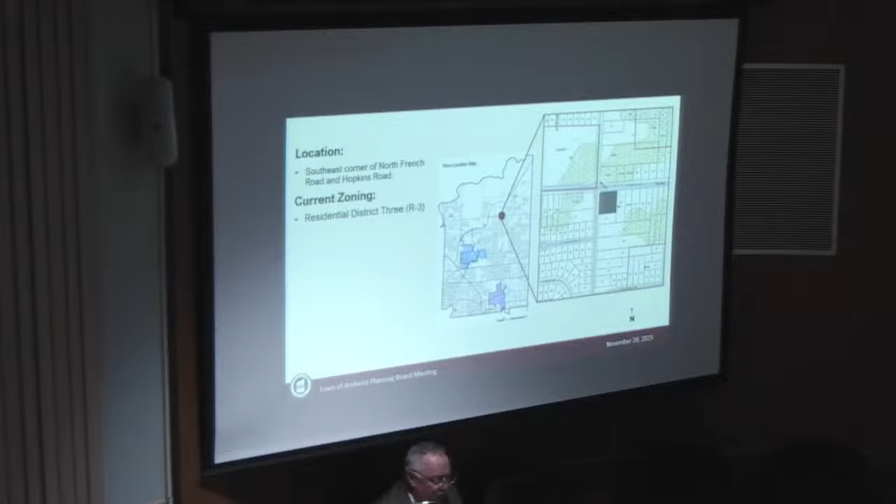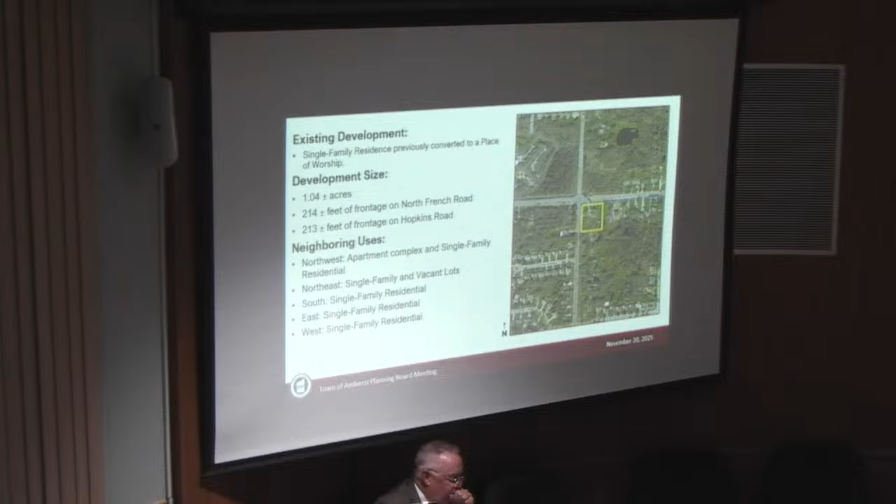Represented by Andy Marino from Trito Engineers. Good evening, Chairman and members of the board. Andrew Marino from Trito Engineers, representing Troutman Associates and the Gurdwara, a redevelopment of the current Gurdwara, which is on site. It is an existing 2-story frame residence which has a parking lot for 32 cars. We're proposing a new facility, parking for 34 cars, in replacement of the frame house. The facility is roughly 6,900 square feet, one story.

It is supported by a driveway off of Hopkins. There's an existing driveway off Hopkins, which we're relocating, and there's an existing driveway from North French, which we are eliminating at the recommendation of Erie County Department of Public Works.

We're here to answer any questions that may have come up. Since I've resubmitted drawings late last week, I haven't received all the department reviews, but the ones I did receive were all approved, with a couple small conditions about details. Other than that, we're here to answer any questions that might come from the board for operations or otherwise.

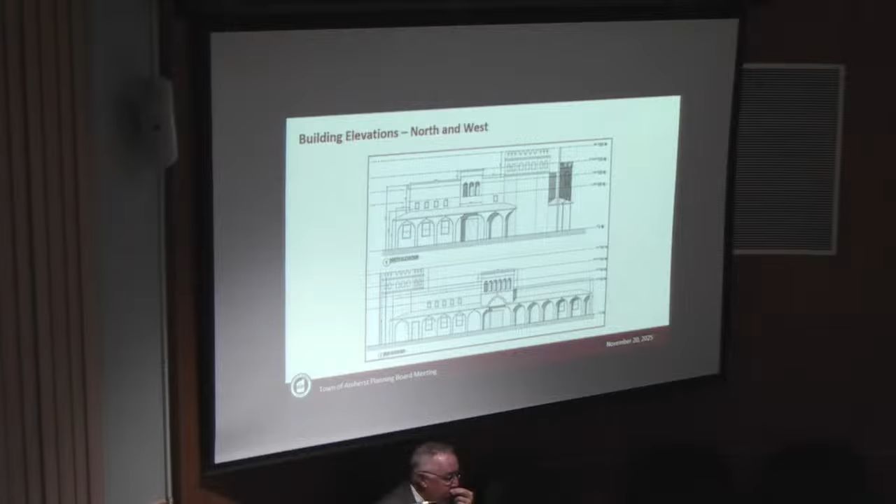Before we ask questions, can you confirm the square footage that you just said? I might have heard it wrong. I believe it's about 6,900 square feet. Okay, all right, I heard it differently, so very good, thank you.

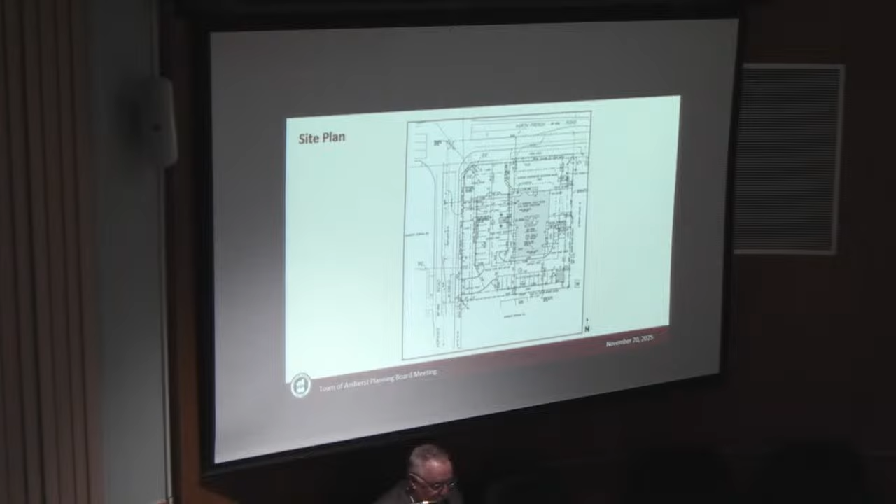John, do you have any questions? How large is the existing structure? It's a two-story frame residence. It's got 4 bedrooms. I don't know the exact square footage. It has a basement, which is going to be completely demolished. Was there a time that they had done an addition onto that, correct? I'm not aware of that. That's all I had.

What's your total occupancy expected for the structure? The occupancy is based on the number of seats in the worship hall, which is 96 occupants, I believe. Capacity for 96. So you have occupants for 96 and parking for 34. That's correct, based on the metric for a house of worship, 1 space for every 3 seats. There are no seats, however, there are spaces available.

Where are the available spaces that you speak of? In the 34, that's in the calculation? 34 would be per the calculation, one per every 3. So that'd be 1 seat for every person in the facility that's in the hall.

In the worship hall, you'd have adjunct people as well supporting the hall? Nope, they are the same individuals. Okay, no further questions. All right, and to clarify, you're going from 32 spaces to 34? That's correct.

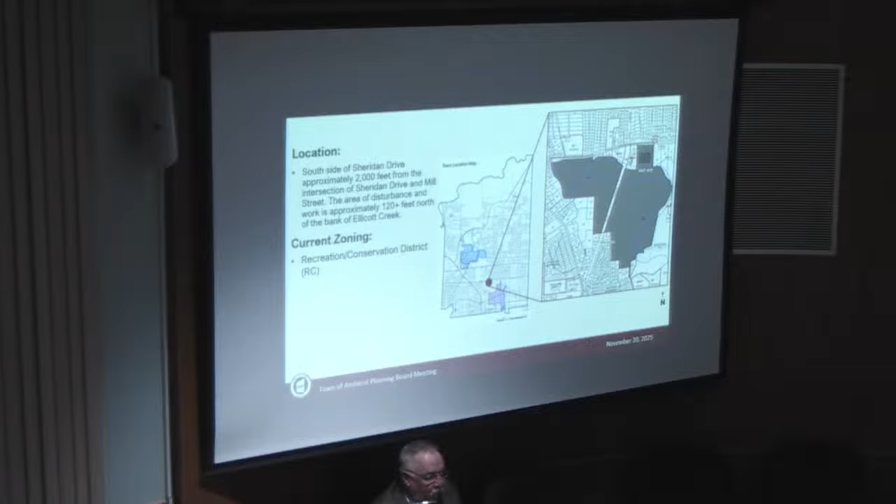Good evening, my name is Jeff Palumbo. I'm with the law firm of Block Longo. I'm here with the Park Club General Manager, Dave Kalikia, and Ken Ryder, who's done all the work on this project. As you indicated, it is a Park Club expansion, somewhat of an expansion, an open-air terrace. I'm going to let Ken go through the PowerPoint, and Dave and I are here if you have any questions. Thank you, Mr. Palumbo.

Good evening, members of the board. Kenneth Ryder, architect with HHL Architects in Buffalo. We're the architect of record and representing Park Country Club. We designed this project at the request of Park Club. The rear terrace of the private club is the subject area. It's only visible from the golf course.

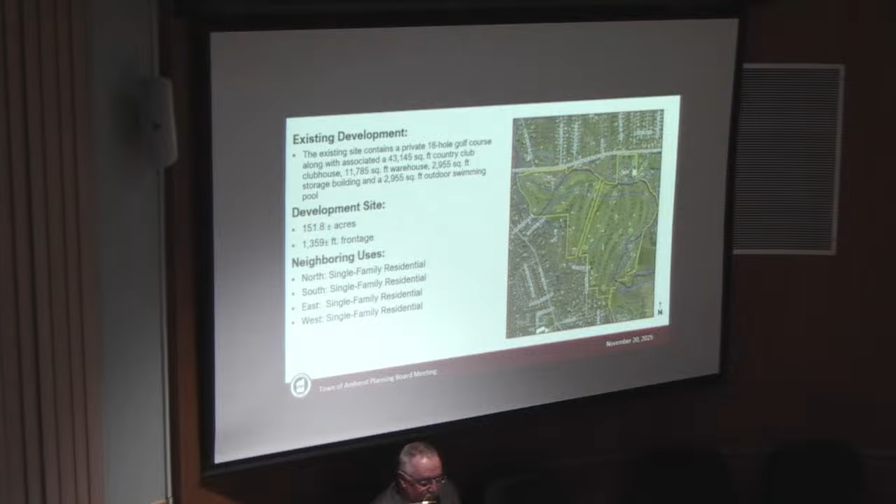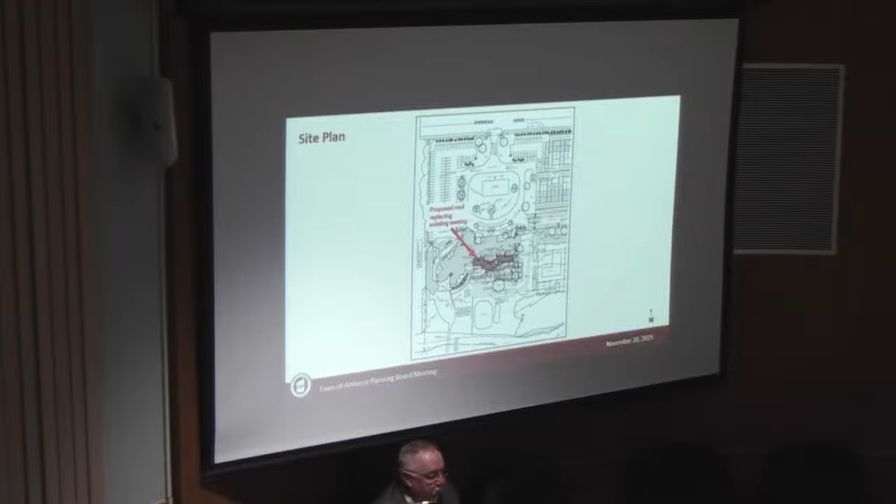What has happened through the years, through decades of use, it's been covered by awning, 3,980 square feet. You can see it in the gray behind the clubhouse. Sheridan Drive is at the top of the sheet, and the golf course is directly on the bottom. The terrace has been covered by awning for decades, and the club has requested to make it a hard roof construction, open air terrace.

So the roofs are all new construction with support structure down to the existing terrace. The 4,000 or so square feet is comprised of new concrete flooring with porcelain tile, an upgrade from standard concrete. The structure is a timber appearance of columns on a stone base that matches the existing clubhouse, paired columns for scale. The timbering is painted faux wood, PVC, but made to look like wood.

And then the roof structure is basically a standing seam copper roof, not unlike the character of the building, which has some copper, slate, stone. It's a 1927 building, not historic, but of historic eligibility with SHPO. We've had SHPO comment on this, and they've been very favorable to the design and the way it blends seamlessly in with the clubhouse. So we're quite pleased.

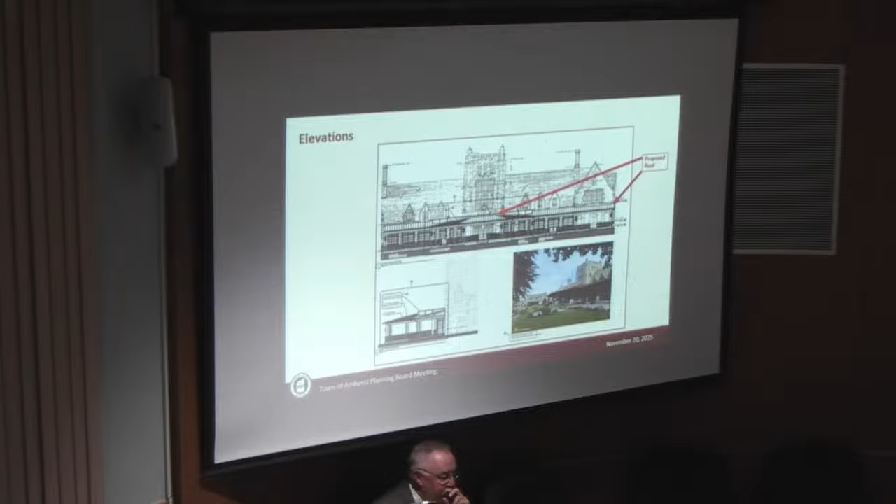Next is Benderson Development, the Amherst Development Park expansion, additions, revisions.

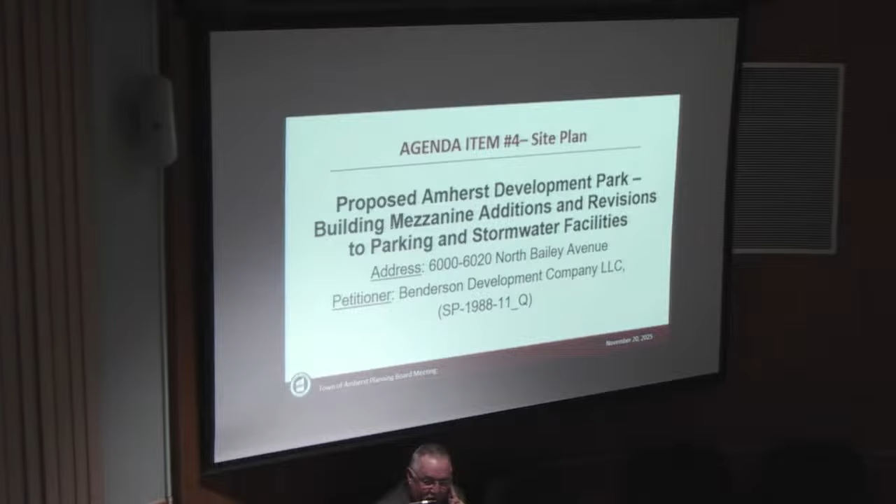Mr. Boglioli, I believe you're up next. Oh, there he is. Tick, tick, tick. I'm sorry, I was sitting in the back, can't see that far. Good evening.

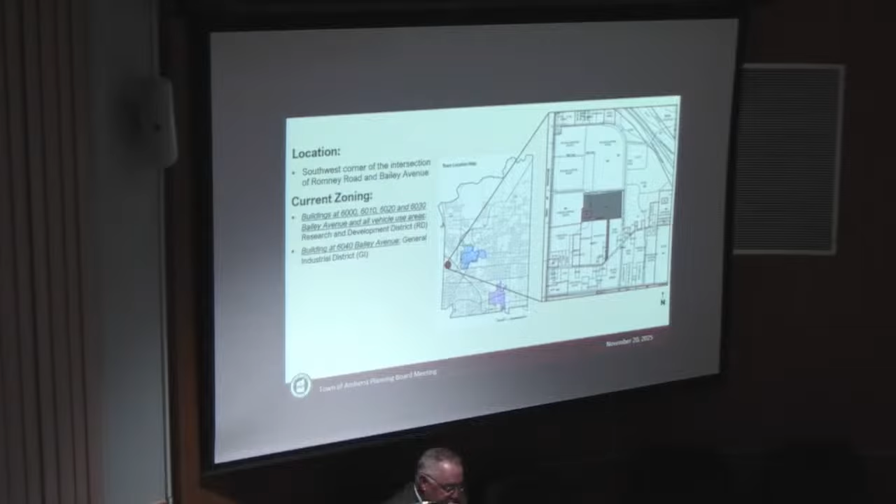James Boglioli, I'm an attorney for Benderson Development, 570 Delaware Avenue, Buffalo, New York. This is our project at 6000 to 6020 North Bailey Avenue.

Next slide, please. I know the board's familiar with this site. You issued an approval in February of 2025. We're moving our office headquarters here, both for Delta Sonic and Benderson, including all of our warehousing, research and development, soap manufacturing, everything to this site. The site is under construction.

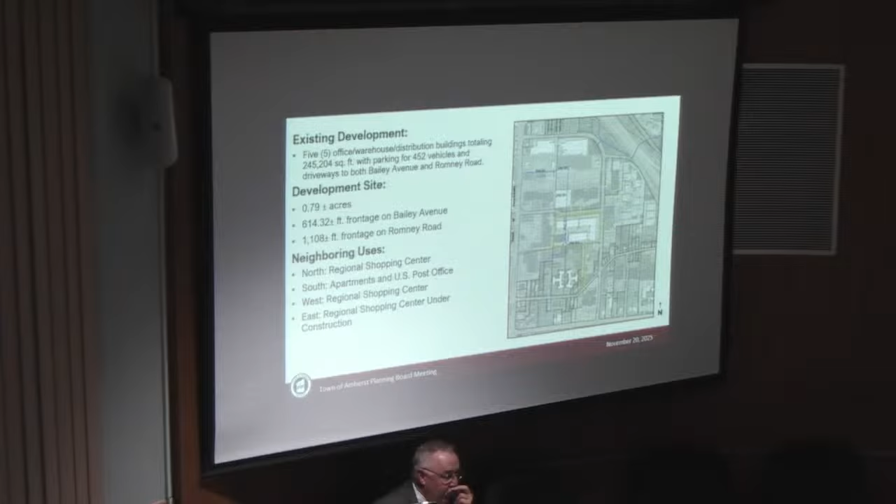Next slide, please. Next slide, please. Was there a different slide, Dan? That's it. So this is the site. I'll be quick. This is Delta Sonic's headquarters, Benderson's headquarters office building, and Delta Sonic is taking this entire building for their new facility. This is a pretty simple application.

We're adding 3 areas of mezzanine to the existing buildings. One of them is located in the office building, that's about an additional 17,000 square feet. That's for no additional employees. When we're laying out the inside of the offices, we were so tight, we're going to spread them out, move some upstairs. It doesn't result in any additional parking or any additional people, same amount of people in the building, just adding a mezzanine floor.

Then we have 2 mezzanine areas in the warehouse building. That's not for people either, that's just storage of stuff. Because of the additional square footage, it got kicked to a major site plan. The only other change we're making: we got a variance to add another row of parking against the southern property line, but we determined we didn't need the parking, so we're going to leave the green space instead of adding parking there. Those are the changes to the site from when the board last saw it.

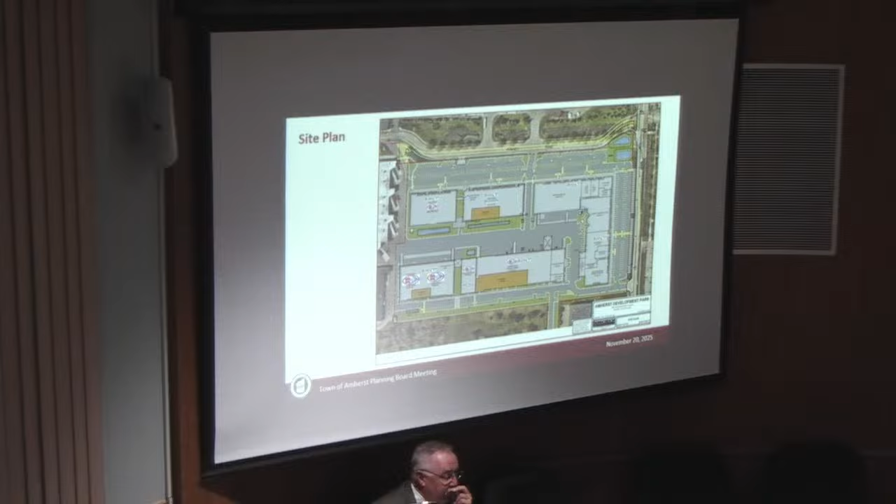And I'm happy to answer any questions. Okay, then.

Now, my understanding is one building, at least the mezzanine, you're not necessarily going to use as second story space. We may not, this building is the office. We laid out offices up there, so that's going to be used. We may not be using the mezzanine in this area, we're just adding it at this point. But in transparency, because you're seeking this approval, you could build it out at any point. You're not saying it's office space, but it could be converted to office space.

Yep, and then we would require additional parking, and we have to go back to the town. If we convert to office, we'll have to go back to the town. Those are the only questions I have.

No questions. No questions. Thank you.

Is there anybody in the audience tonight who wishes to speak on this? Hearing is closed.

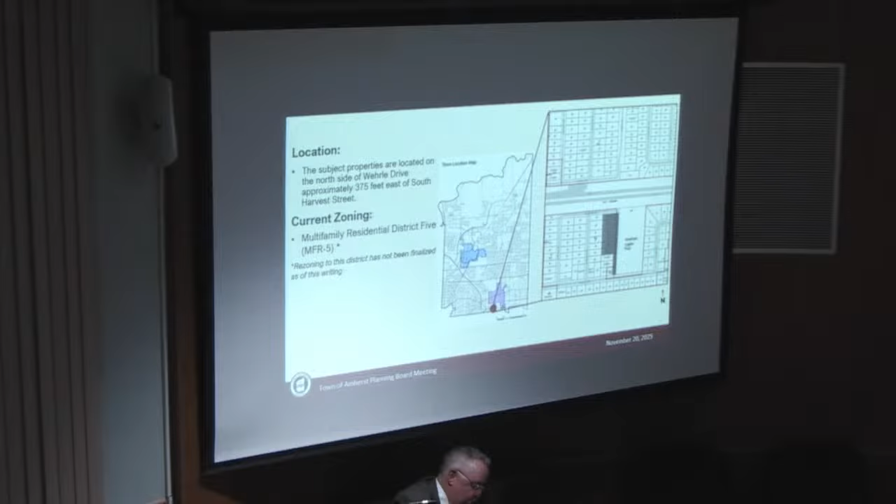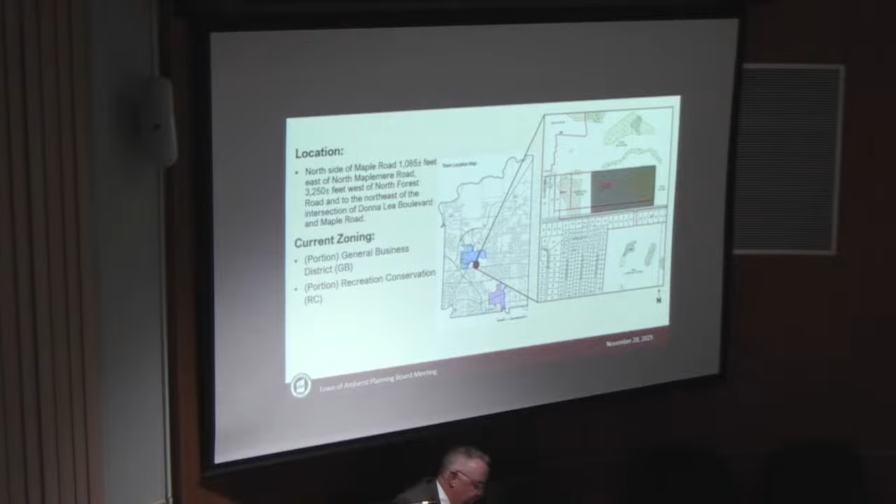716 Sports Complex, represented by Mr. Hopkins. Good evening, Chairman O'Rourke and members of the Planning Board. Sean Hopkins on behalf of the applicant. I want to note this is a project you actually saw in almost identical form last month in connection with the request for relief of zoning conditions. You issued a positive recommendation by unanimous vote, and ultimately the town board approved that. So we're going to really try to focus tonight on anything that's new. However, if there are any questions about how we've gotten to where we are, or the project itself, feel free to ask.

So as you'll recall, Dr. McGrath is here. He did a convincing job a month ago giving his vision for this project - why he's undertaking it, why he cares so much about the town of Amherst, why he cares about people's health, and why he wants to accommodate the broad range of athletic activities that currently can't be accommodated in Western New York. We're not going to go over all that, but it is in the presentation.

Also, members of the project team are Dr. Mark Feinberg, Justin Feinberg, and Madeline Schaus. Justin and Madeline are here. We also have members of LaBella, Frank Simonelli, and a wide range of members of the project team. So if we could go, Dan, to the site plan slide.

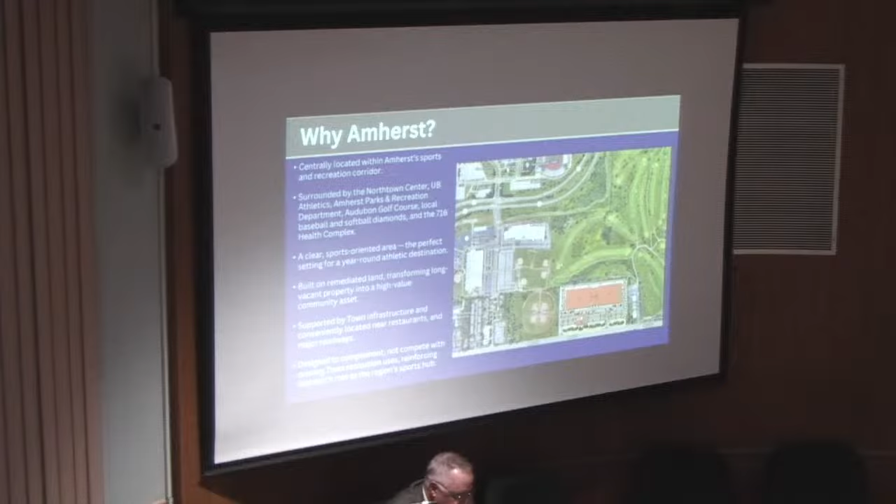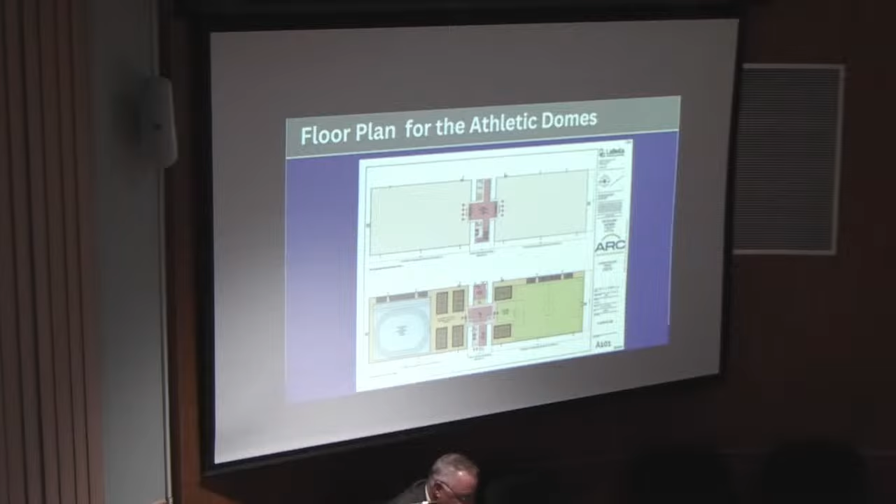That's part of the justification for the height of 85 feet. As Mr. Ulatowski indicated in the work session, the Zoning Board of Appeals did grant a variance for that during its meeting on Tuesday evening. Now you can go to the site plan, Dan.

In terms of the site plan itself, it's 21.3 acres in size, properly zoned general business district and recreation conservation district, with 101 feet of conservation frontage in front, pursuant to the original gun club rezoning. We are showing one signalized intersection onto Maple Road, which is a county highway, and both domes will have a size of approximately 137,500 square feet, connected by that 50,000 square foot commercial community facility building.

When we were here previously, as you recall, we showed a hotel right here. For now, because we need to make sure this project's successful and move forward, we've removed that from the plan. It did allow us to increase the number of parking spaces to 524. At some point in the future, if we're comfortable we have adequate parking, that will probably come back in front of you. I want to acknowledge for the record, and this is in the drafts of the documentation, it will require a completely separate review process, including a public hearing.

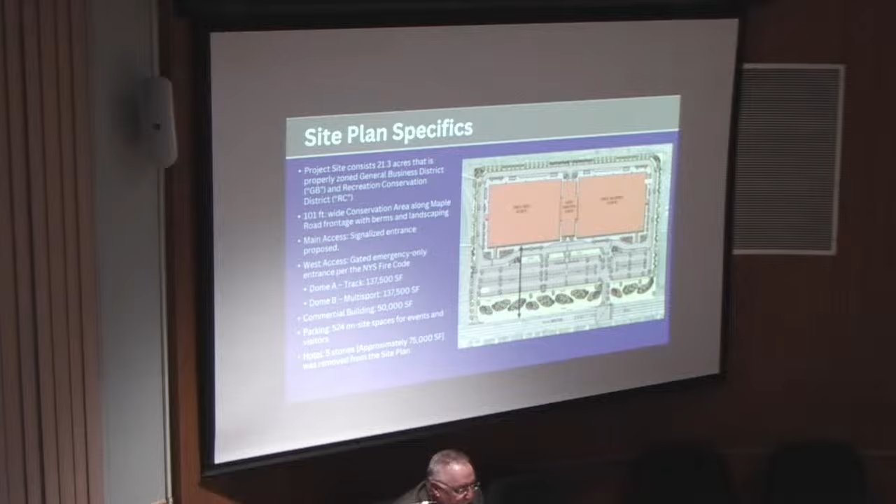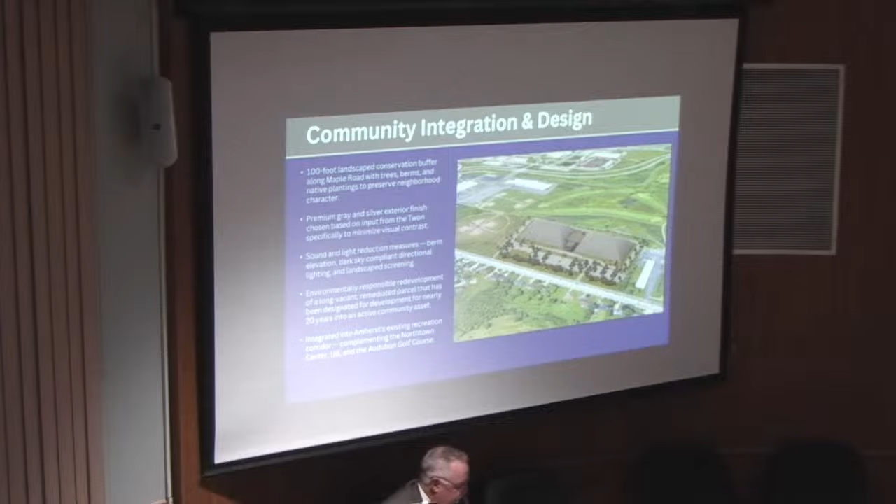This was not available - it's a visual simulation of the actual dome building. You can see Maple Road, and UB there in the back. It's important to note we did immediately, based on input from the planning department, upgrade the building material. You've all seen these athletic domes - they're typically that stark white color, which some people might view as objectionable. So we've updated that to an opaque premium gray and silver exterior finish. It does cost some additional money, but it's part of our effort to be responsive to the input we've received.

Just want to talk about the conditions imposed by the town board. Basically, they eliminated the previous condition that limited the height to 50 feet, and also the condition that limited retail establishments to 50,000 square feet. We are still agreeing to the conservation area along the frontage, and we'll show you a landscaping plan we prepared in a minute, along with the extensive landscaping and screening we'll be providing there.

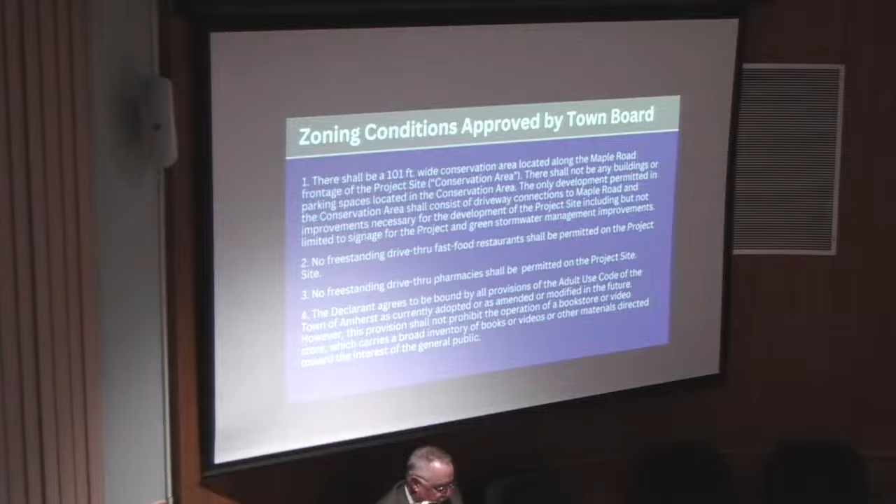It's also important to note that when you think about the town of Amherst or any municipality, this project will have tremendous positive economic impacts — not only property taxes, but all the visitors to the area, all the revenue that will be a direct spin-off of this project, and also construction jobs. So this really will have a noticeable economic impact on the town of Amherst, Erie County, and the school district.

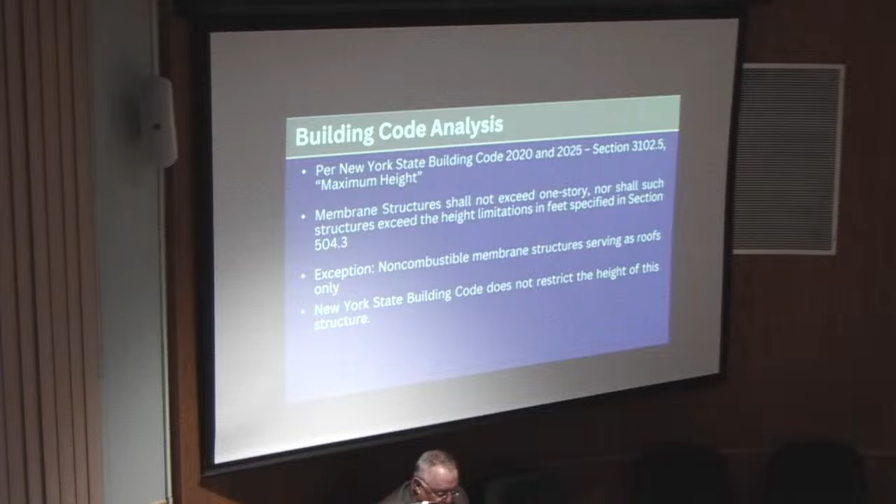Building code analysis: I do want to note early on that we received a comment from the building department questioning whether this is a permitted structure. The LaBella team has confirmed, based on applicable sections in the New York State Building Code, that it is permitted.

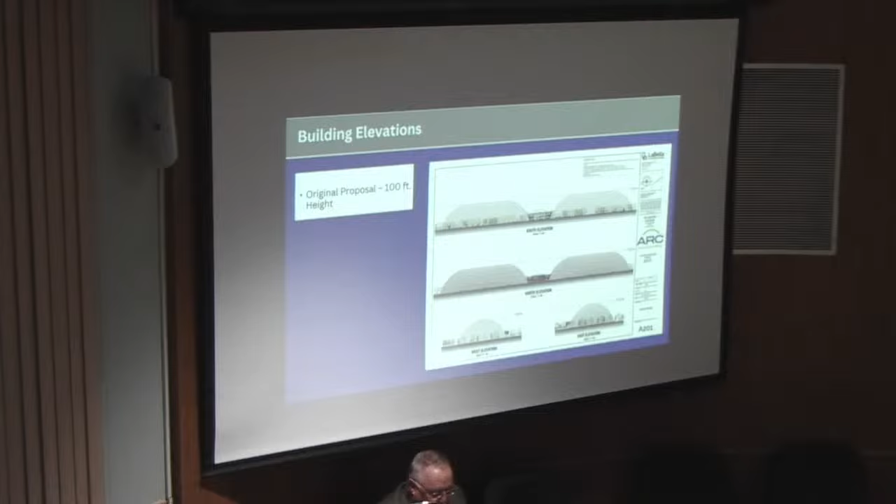This is the original elevation for the domes. At that point, we were at 100 feet, and we reduced it down to 85 feet. 85 feet was not some arbitrary number — that is the minimum height for these domes that we need for them to be functional, meaning to be able to undertake the broad range of athletic activities that we're proposing. It's also based on the actual construction of the building as well.

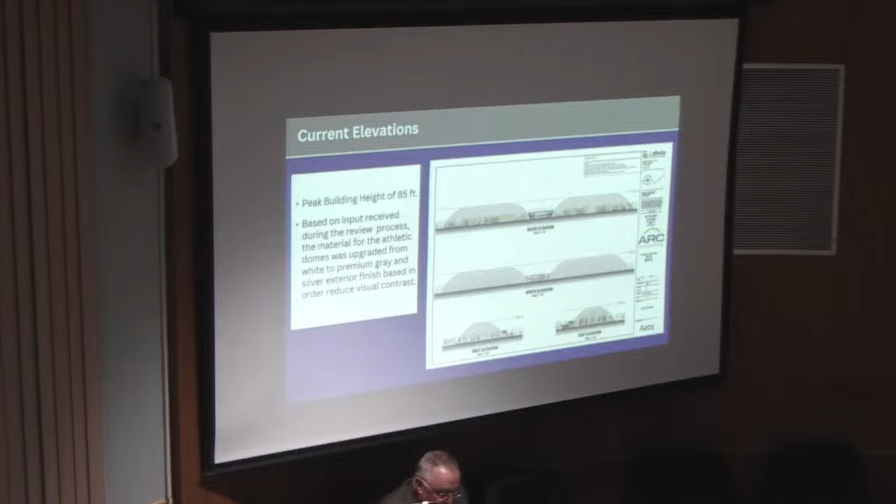There are some visual simulations we were asked to prepare. This shows what will occur over time as all those trees and plantings are installed, providing some type of buffer along Maple Road. It's important to note we are 330 feet back from Maple Road with the dome structure itself. The Maple Road right-of-way is approximately another 100 feet, and then there are residences on the other side, but they're a minimum of, I would say, at least 500 feet away from the actual building itself.

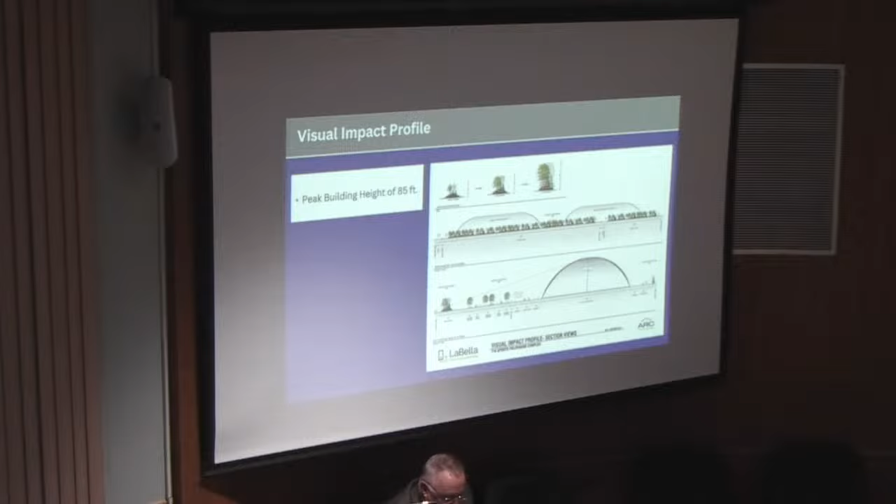Show you the profile. I do want to note the mean roof height — while the peak is 85 feet, the actual mean roof height is 42 feet 6 inches. One of the other reasons for that height is because of where we are. Obviously, we have inclement weather in Western New York, so we have to accommodate snow loads and make sure that snow does not build up on the top portion of the dome. We've seen what occurs when that's not handled properly.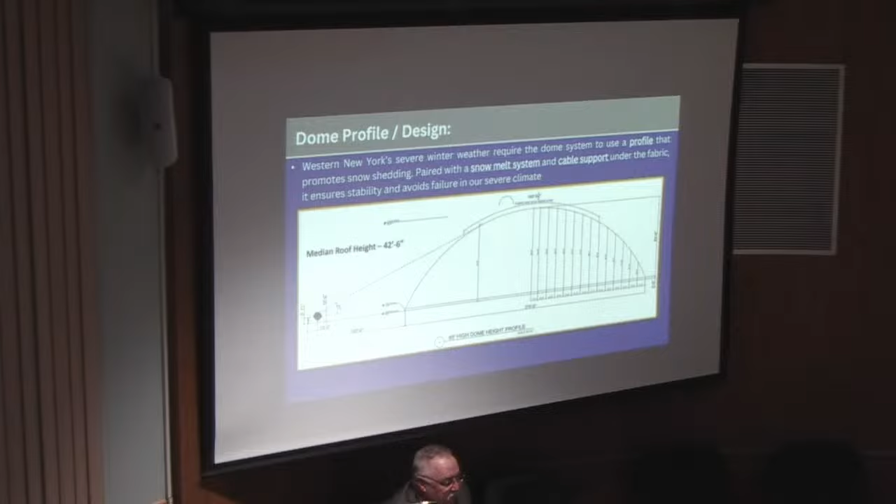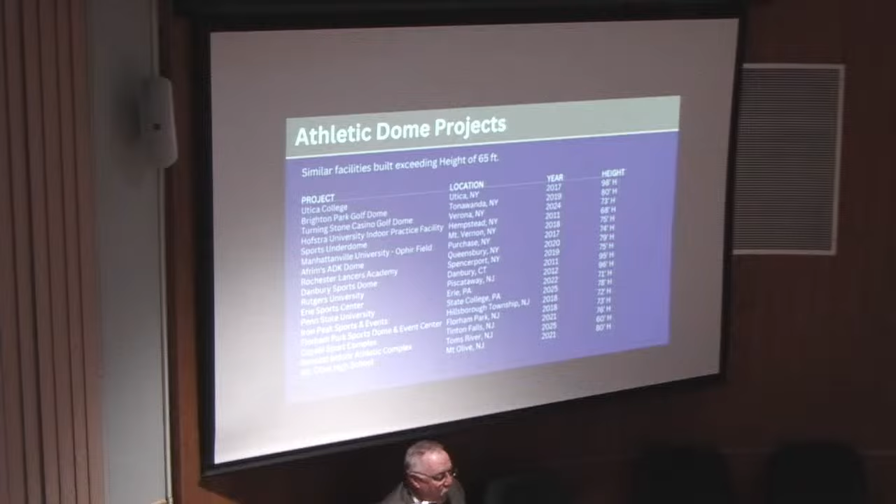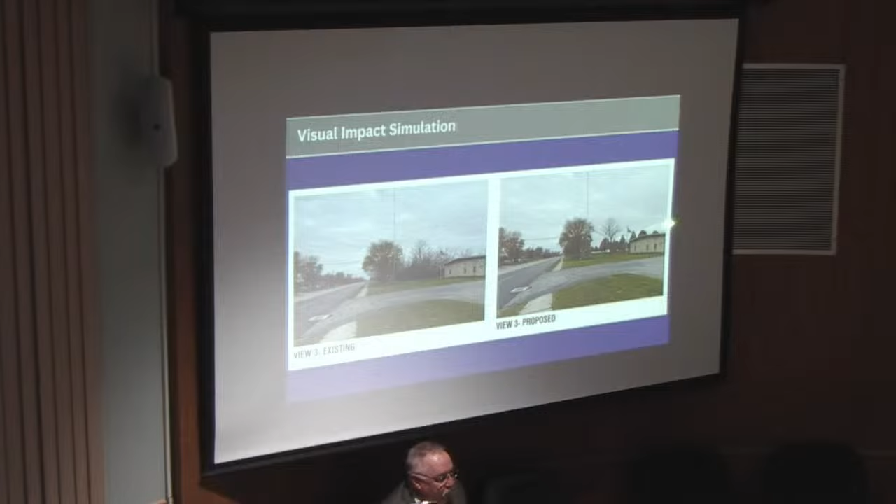We have made numerous submissions to the planning department in connection with this project. We do want to thank the planning department staff and other town departments — they've been very responsive and very collaborative. There will be a whole host of conditions that we'll need to satisfy. We are also in discussions with various stakeholders, including the town and UB, about providing off-site parking during peak demand periods when we have bigger events. So far, those discussions have been fruitful.

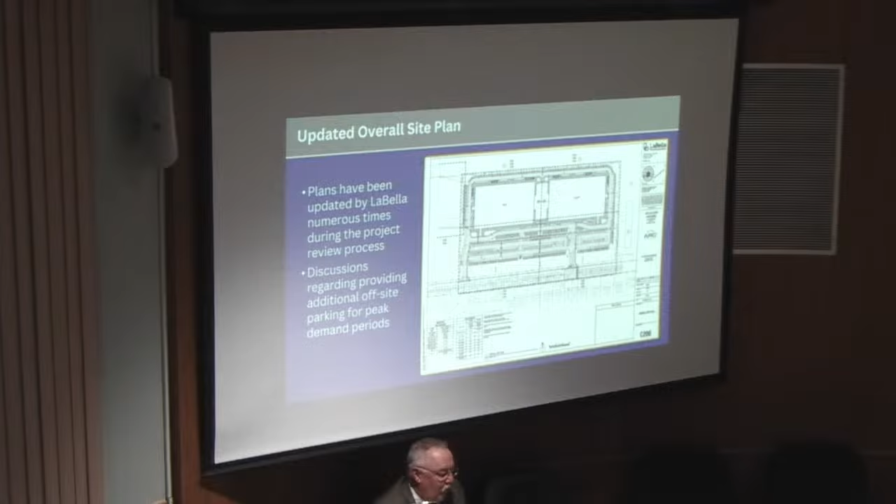Obviously, we want to make sure that we have enough parking. The town wants to make sure we have enough parking. There are no options, obviously, for street side parking along Maple Road. So that's a work in progress. Those discussions will continue. Ultimately, Mr. Ulatowski will have to confirm that he's okay with the alternative parking analysis.

Next slide. Updated overall landscape plan. I was going to put the entire planting schedule, but there's simply too much information. This provides very extensive plantings on all four sides of the project site, with an emphasis on that 101 feet along Maple Road in that conservation area. So that conservation area will finally come to fruition. If you drive by the site now, you don't know it's there. There's really no vegetation whatsoever, but now we'll finally be planting those trees and other plantings to provide that visual buffer.

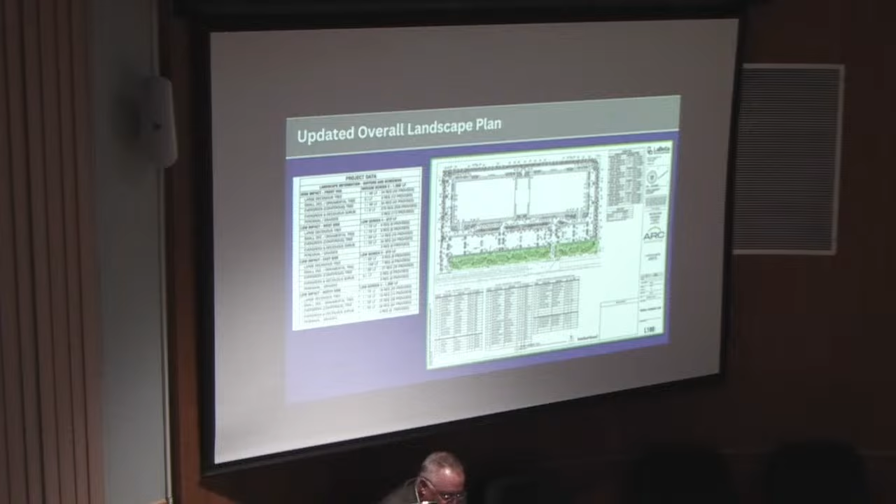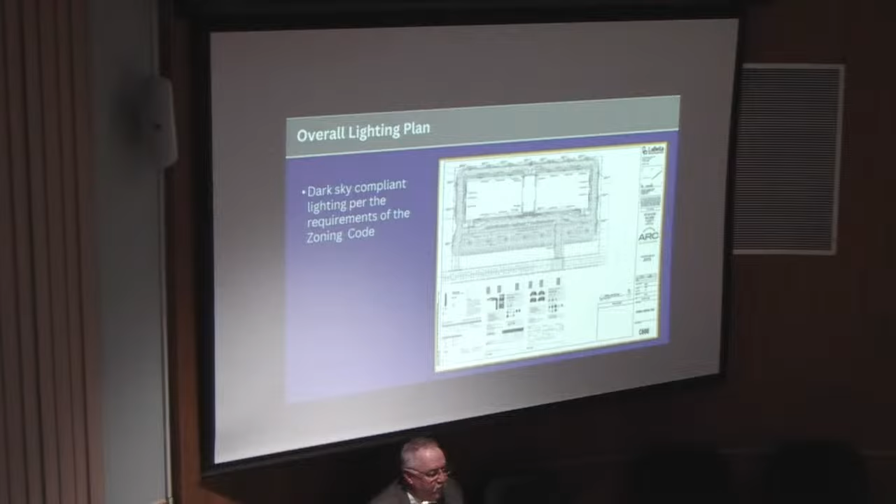Next slide. Overall lighting plan, important to note there will be dark sky compliant lighting, and most importantly, no lighting spillover onto the adjoining property owners. If you actually look at the lighting levels here, basically the lighting will not even extend into the conservation area at the spillover. So we will not have adverse lighting impacts.

Next slide. Fire access plan for Mr. Raphael. So we have worked with the town in terms of Appendix D of the fire code. We're showing a gated emergency access drive here, and we've added the required access aisle and signage to that plan. Ultimately, that will require final approval of the town's fire safety division, but we have made those changes.

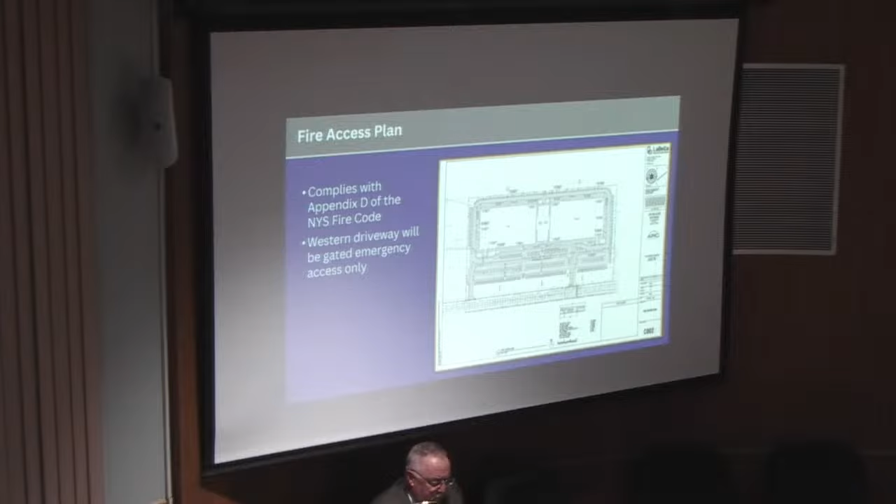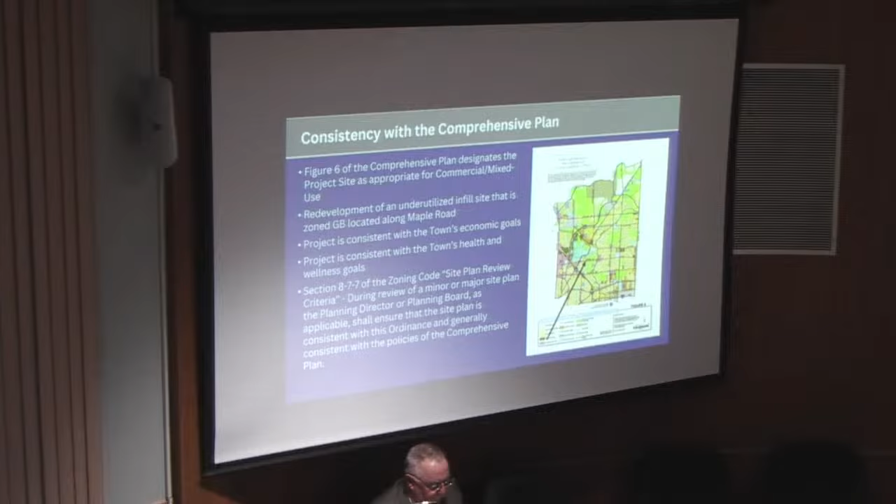Next slide. This project quite clearly is consistent with the comprehensive plan. If you look at figure 6, and I've drawn an arrow there, it is designated as appropriate for commercial mixed use. That designation has been in place now for approximately 17 years. It is properly zoned. It's clearly consistent with the town's economic goals, the town's health and wellness goals. And if you look at the site plan criteria specified 8-7-7 of the zoning code, basically to a large degree, your decision should be made on whether it's consistent with the comprehensive plan, which it is. In connection with your review last month, you did issue detailed findings that you thought it was in support of the comprehensive plan, and those same findings apply this evening.

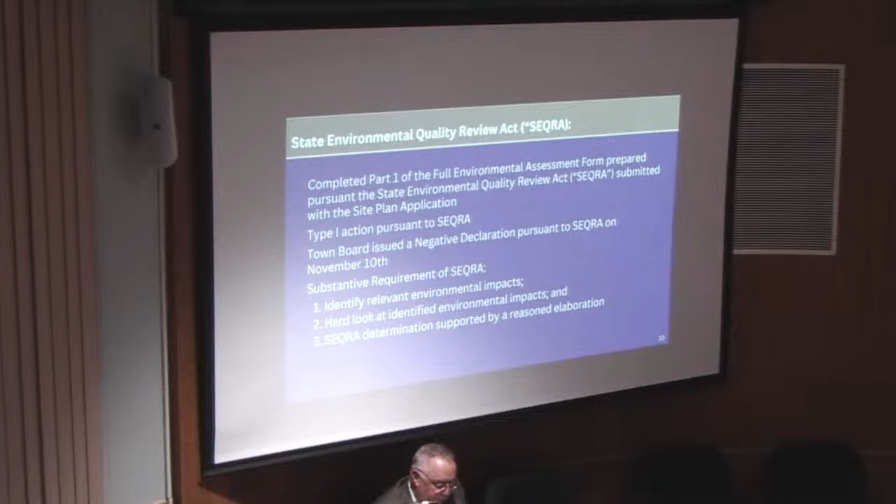Next slide. SEQR, I'm going to touch on very, very briefly. Most importantly, the town board has already issued a negative declaration during its meeting on November 10th. You've been provided with extensive documentation demonstrating this project will not result in any potentially significant adverse environmental impacts. Next slide. And that includes the fact that, number one, this was formerly a contaminated brownfield. It has been cleaned up. One of the key aspects of this project in terms of timing is if we can complete this project by May of 2027, we will be eligible for the brownfield credits. We don't want those to burn off.

Next slide. Traffic, we've provided a detailed traffic study. There's been meetings between Labella and the Erie County Department of Public Works, which has jurisdiction over Maple Road. And there have been some preliminary comments from DOT. We'll continue to address those.

Next slide. Wetland impacts. So the DEC did come back and take the position that they believe there's jurisdictional wetlands on the site. We will be seeking a wetland permit. I do want to note, because that takes some time, we are asking this board to impose a condition that would allow us to disturb non-wetland areas prior to that permit being issued. It's absolutely essential, and during the work session, that particular condition was discussed.

Next slide. Stormwater management system, we provided engineered plans demonstrating we comply with the requirements, including the need for the system to handle a 100-year storm event. I also want to note, there was a meeting just yesterday with the DEC's wetland contractor, Arcadia, so we're going to be pursuing that wetland permit as soon as possible in an effort to try and expeditiously obtain that permit. Next slide.

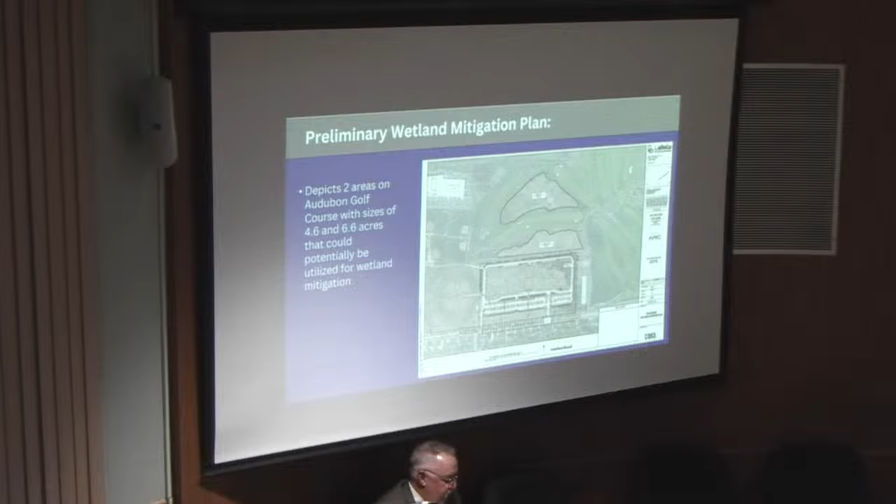In terms of everything else, I think we've confirmed. I do want to note we'll have to demonstrate that we have downstream sewer capacity. That analysis is underway. In summary, I think we've demonstrated this project will not result in any potentially significant adverse environmental impacts. So what we're asking you to do this evening is issue a negative declaration and approve the site plan subject to conditions. Myself and the members of the project team welcome the opportunity to address any questions you may have. Thank you.

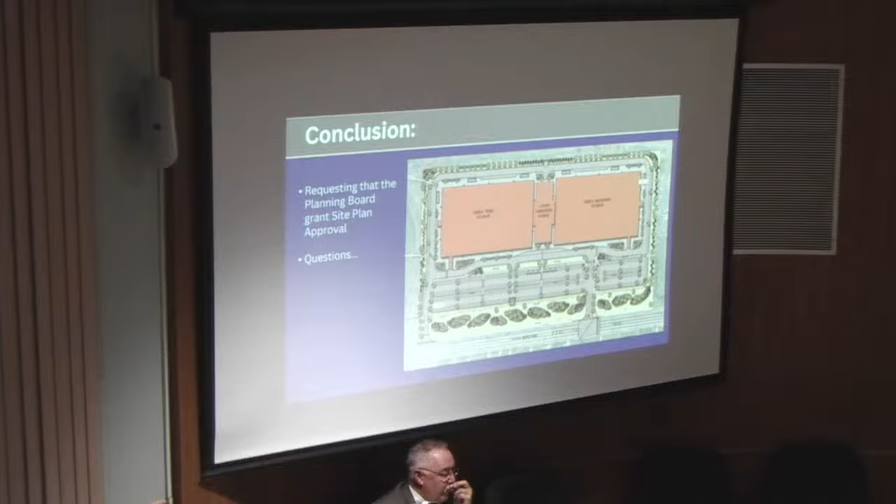Thank you, Mr. Hopkins. I have a question. Does 716 Sports Complex have any sustainability goals or a mission for this project? I'm curious what the power requirements are for this facility.

Dave, do you have any thoughts? Yeah, we're just simply not there yet. But I don't think it's extraordinary, and obviously, given where we are on Maple Road, we're quite comfortable there's capacity in the electrical infrastructure.

Are you thinking about putting any electrical car chargers in the parking lots? I assume, yes, we will be. Are you looking at energy efficiency for the buildings, like LED lights, heat pumps?

Come on up, Dave. Dave Johnson is from Labella, so I want to have him take a shot at that. Once we get final approval from the board— just for the record, identify yourself. Sure, Dave Johnson from Labella Associates. Once we get final approval from the board, our architecture team will then take over and start going into the building design portions of it.

Yes, they will be doing energy efficiency as part of that. I don't know exactly what that is yet, but I'm sure LED lighting is—well, that's pretty much what all lighting is now, so they will be using that throughout. I know the site lighting, as part of this process, is all LED, downlight, high efficiency lighting, so I know that is the case. As far as the building goes, we are moving into that after site plan approval to go into the full design. Right now, all we have for that building design is what you see for site plan approval.

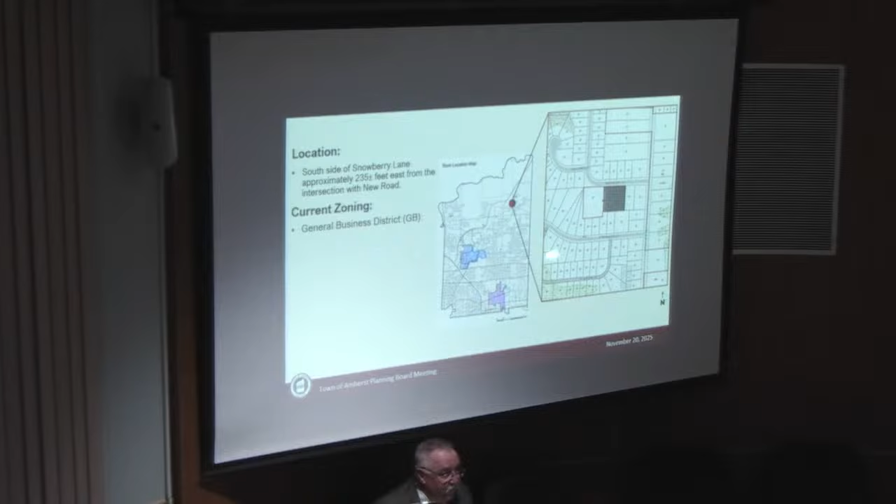So my name is Eric Bennett. I'm here representing myself, rezoning 95 Snowberry Lane. Just to you guys understand where the location is, this is over by New Road and just south of Smith, essentially at the end of where the 990 is. So it's about a 1 acre parcel.

Is outlined there in yellow. The north, south, east, and west side of it are all single family residential.

Next slide. Actually, return that one real sec. Just want to make a quick comment too. This is a 1 acre parcel. You can see the 3 houses across the street, just to the north of it. That would normally be put into this essentially 1 acre parcel if it was zoned back when this residential area was already built up. There has been proposals for other builders to buy this lot and essentially put 4 houses there. Luckily, the homeowner who lives at 75 Snowberry, the Jacobs family, has declined that, and they have chosen not to sell it to a builder. So that's why I'm representing myself, essentially to purchase this lot and split it myself.

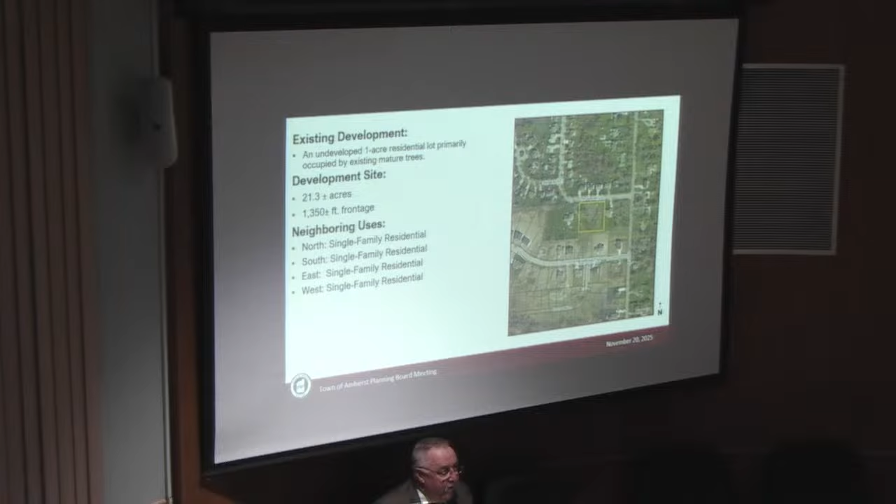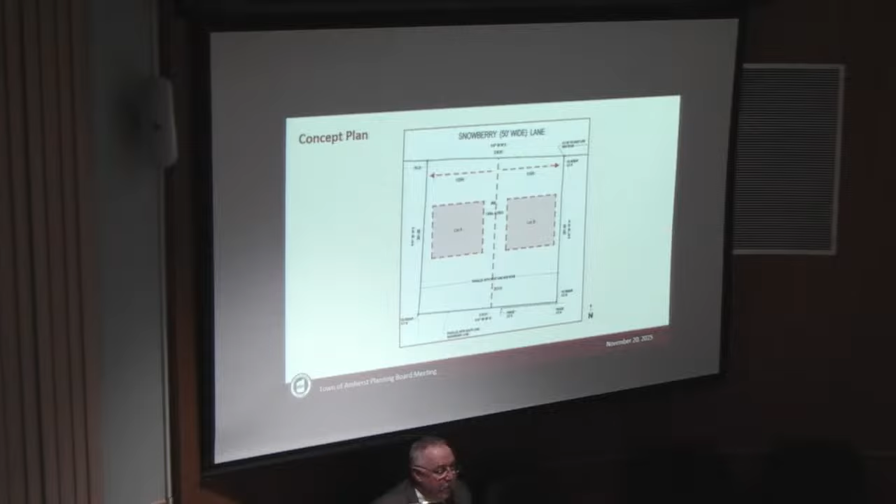Next slide. So this is a proposal of what I plan on splitting it into 2 half-acre lots, Lot A, Lot B. Lot A is where I plan on building my house essentially and moving my family up from South Florida. Lot B, I plan on either selling to the builder or putting it up for sale for anyone else to purchase. Next slide.

That was it. All right. So in conclusion, essentially, again, pretty much we plan on building a 3,300 square foot house on Lot A, as I described. Essentially, it's going to fit the existing neighborhood. It's going to be mainly siding. We're trying to bring in some of the new builds. Also, just to note that the Natali neighborhood is directly behind it, so those are all brand new homes behind it. We're going to try and bring some of that aesthetic into the existing neighborhood and essentially kind of upgrade and refresh the neighborhood a little bit as well. This is going to essentially increase tax revenue for the town of Amherst and also increase home values in the existing neighborhood. So, thank you. Any further questions? Thank you.

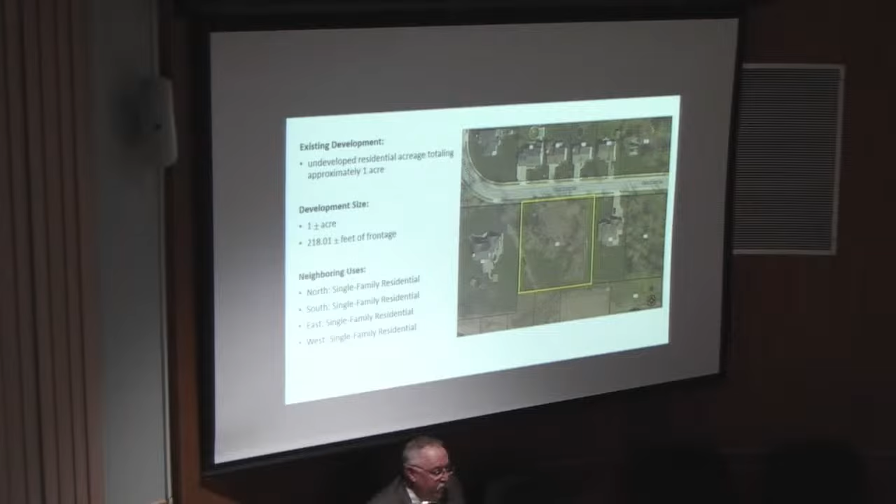No questions. What approximate square footage did you mention the house would be? 3,300. Yes. About the same for both houses? Yes. Thank you. No questions.

All righty then. Is there anybody in the audience who wishes to speak on this matter? Seeing none, the hearing is closed.

Moving right along to item number 8, which is the Town of Amherst zoning code text amendment to the Urban Renewal Overlay District. And we, again, are recommendation only to the town board.

That's correct, Mr. Chair, members of the board. My name is Chuck Malcolm. I'm an attorney with the law firm Hodgson Russ, and we serve as special counsel to the town on the Boulevard Mall redevelopment project. Also with me is Lori Stillwell from the town. What we're asking the board to do tonight is to recommend approval of a proposed local law which establishes a framework for an overlay district for the Boulevard Mall properties in what's already been designated by the town board as an urban renewal area. And in addition, that local law does a couple of things.

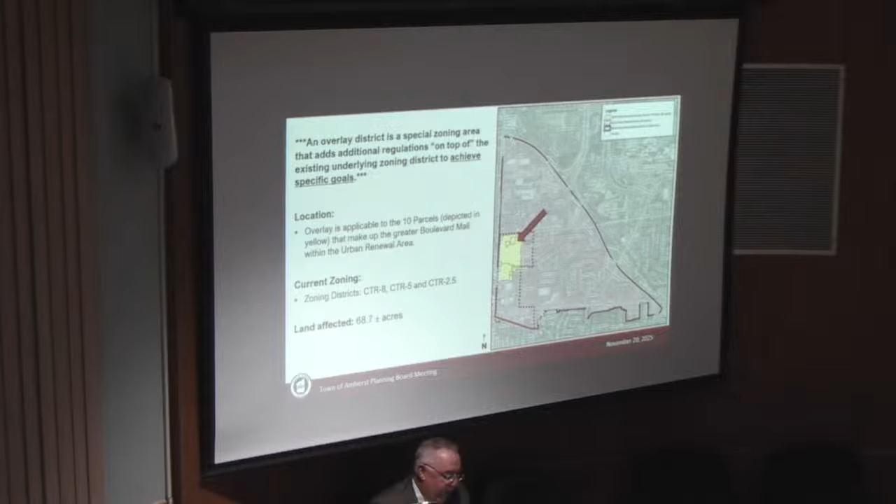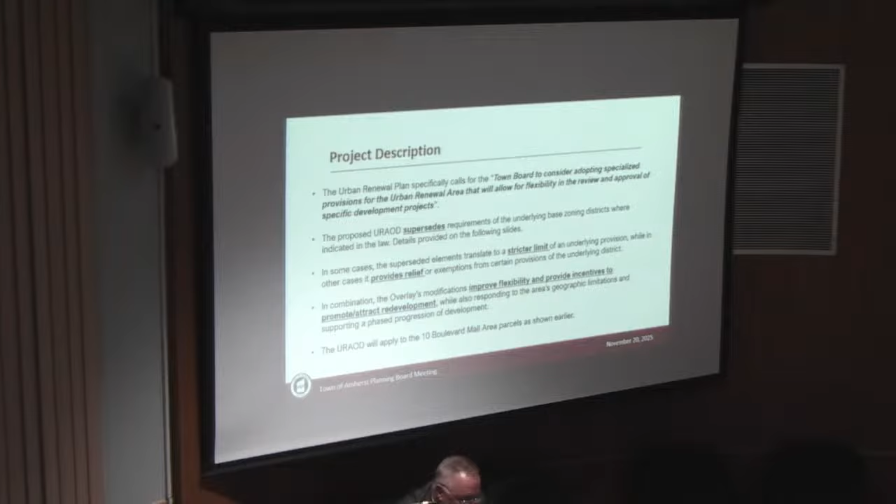This local law draft goes back to the town's planning efforts to deal with the Boulevard Mall. There have been multiple items on the town board agenda to deal with this, and this board specifically participated in the development of the urban renewal plan for this particular area. The urban renewal plan specifically notes that there may be a need to utilize zoning power to provide flexibility to facilitate redevelopment in a certain way, where there are certain impediments that have been identified, and to provide flexibility in the review and approval of certain development projects.

The proposed urban renewal overlay district law supersedes some requirements of the base zoning districts where indicated. In certain circumstances, it provides stricter limits. In others, it provides actual relaxation of certain standards to improve flexibility.

So the goals of the law as currently constituted — planning staff, looking at the mall's revitalization, identified certain provisions of the current code that are restrictive and may be an impediment to development. With that, Lori is going to discuss what those are and how the overlay district and its requirements modify some of the items in the base zoning district regulations.

Thank you. So into the law itself, procedurally, the overlay varies very little from how the town's existing development review procedures and planning board authorities work now.

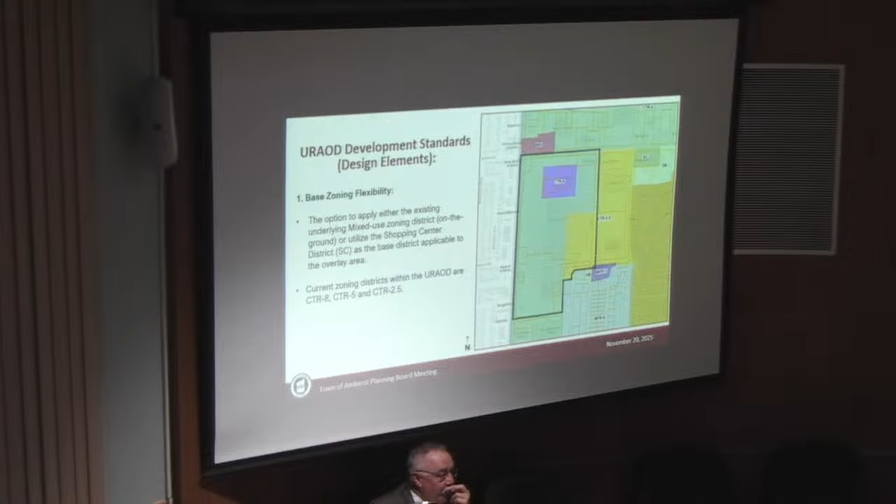When the planning department compared what is allowed under the 5A code currently, in addition to shopping center, and some instances of prior developments in and around town that tried to utilize 5A center district zoning, we determined that there were some complications and elements of 5A that together create really prescriptive elements we should address and provide relief for. We feel that both the shopping center districts and the mixed-use districts can provide the goals we're trying to meet as part of the urban renewal plan. So one of the main elements here is base zoning flexibility.

On the core street framework, there will be two main core streets required to subdivide the site into an initial block structure and provide adequate utility connections. We will be bringing in utilities that come down from Maple and that north-south streetscape — but this is essentially what we are dictating. Further block subdivision requirements are relaxed, allowing for phased, flexible infill development over time.

It's anticipated that development in this area is going to bring in additional streets. What we're really doing is not prescribing exactly where streets need to go in code — we're not telling people exactly where they must put breakup streets. We're leaving that up to the developer to decide. Currently, our 5A districts are pretty prescriptive in that manner.

For street dimensions, our street dimensional standards are reduced to create a more intimate pedestrian scale streetscape and allow for potential future conversion of drive aisles into formal local streets. This shift is really due to the constraints of the geography. Ideally, we would like to fit more density and infill onto the site, but it is landlocked, a greyfield, and it has its limitations.

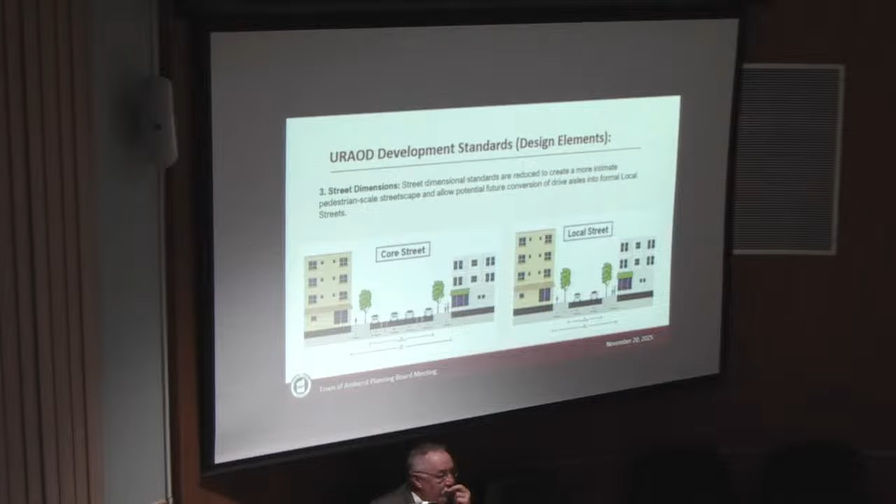The overlay creates a new frontage type called boulevard frontage. This frontage type was derived from a version of 5A's current minor and major arterial frontage types, and it will be mandated along Niagara Falls Boulevard, Maple Road, and Alberta Drive, regardless of the underlying district chosen. If you go back to the slide before, this is depicted — one more. The green outline of the property site mandates the boulevard frontage be used in those areas. Can you skip back ahead?

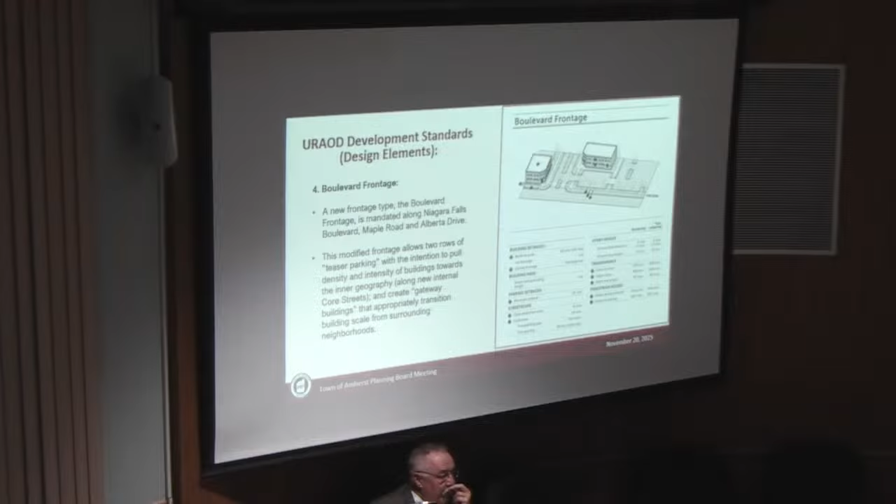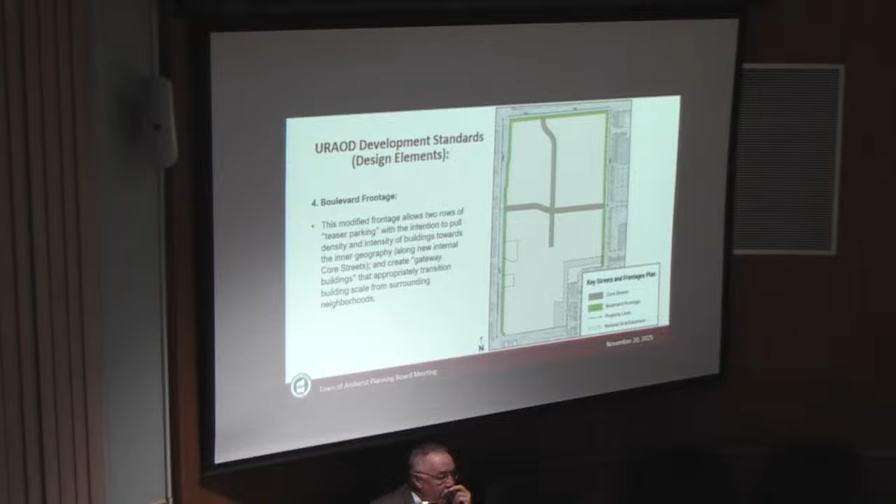So the boulevard frontage allows for 2 rows of teaser parking between the building facade and the streetscape. Our intention here is really to ramp up the density and intensity of buildings towards the inner geography of the site in those core streets we have depicted. The idea is we'll have smaller gateway style buildings along the outer edges and transition into that height, intensity and scale from the outer surrounding neighborhoods near the site.

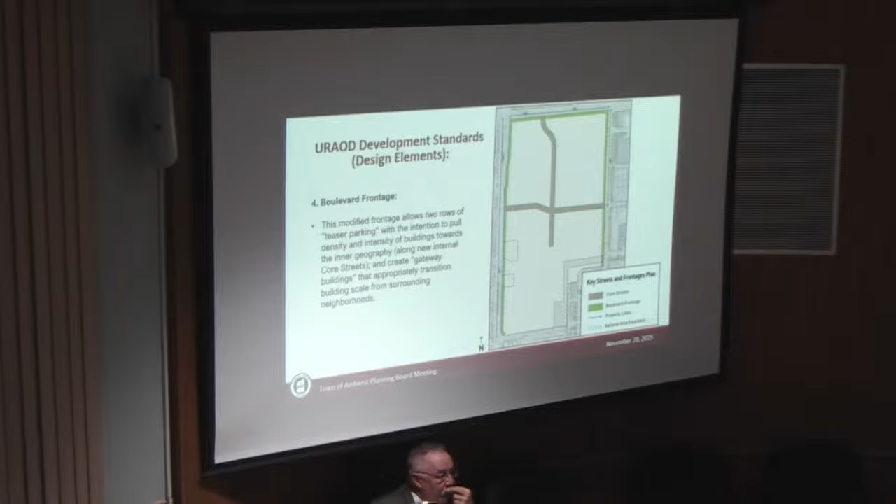For parking standards, the overlay removes off-street parking minimums and provides a 2-story height bonus for projects that include structured parking. So if you can prove that you can park it with structured parking, you can get additional height bonus. Also, the reason we're looking to relax our parking minimums is because the urban renewal plan is looking to create this site as a transit-oriented development. We hope over the 20 to 30-year build-out we'll eventually reach that point, but initially we are relaxing minimum parking standards, as they are a constraint in attracting significant infill. That is our desire here with the parking amendments.

For permitted and prohibited uses, land uses that are inconsistent with the goals of the urban renewal plan, such as single-family detached and vehicular sales, are prohibited. Drive-through facilities are restricted to areas along the frontages of Niagara Falls Boulevard and Maple Road.

This one is a bit jargony and difficult to explain. Currently, in our Mixed-Use Center districts, primary streets are established by a road class, and together with the build-to requirements, that build-to zone, which is this area, with the hold the corner provisions, essentially tells a developer exactly where you must place your building and start building on a site, and which edges of the block face you have to build out to meet your percentage build-to along that entire property line. This is quite prescriptive, and we find it tends to lead to a certain scale of building project that a developer might not be ready for in an initial phase, so we're looking to relax that.

So the major shift here in the overlay places these decisions back in the hands of the developer to identify the primary street, which is more in line with supporting the phased redevelopment we expect and financial viability of development projects.

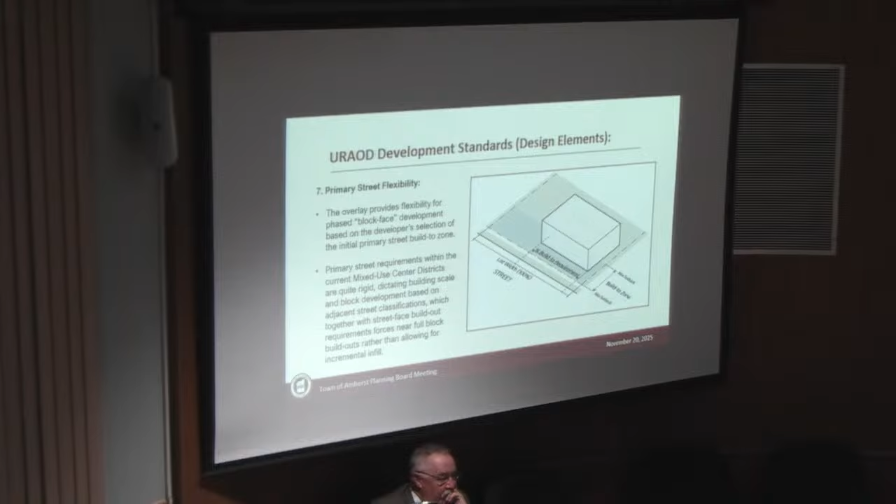For open space standards, publicly owned open space may count towards the percentage of required open space with planning board approval. So you can consider whether or not to award planning board public open space towards a specific project near the site. Currently, the Mixed-Use Center requirement is 5% of the site needs to be open space.

Temporary minor commercial uses, such as kiosks or food stands, are permitted to activate public spaces. We want to create functional, active park space in and around the development, so this is something we're bringing in and allowing that typically isn't allowed now. The requirement for open space to be contiguous is removed, so we're comfortable having little pocket parks in certain locations and smaller areas. We are not forcing a developer to put their full maximum contribution of open space all together in one spot.

The overlay also encourages, but does not prescribe, the following: vertical mixed uses along public spaces, pedestrian walkways and multi-use trails, mobility infrastructure, cohesive architectural design to establish a consistent neighborhood identity, and inclusion of active uses within open space such as sport courts, dog parks, playgrounds, etc.